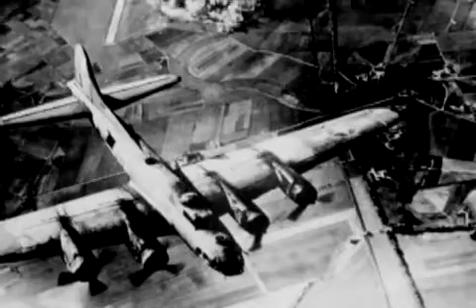The year was 1944. On battlefields throughout Europe and across the Pacific, the most monumental struggle in human history was being waged. It was a year in which the long-awaited Allied landing in Normandy signaled the beginning of the end of World War II. Arrayed against such a backdrop, most events tend to pale in significance. And yet, it is exactly in this historic context, 60 years ago, that the PM industry experienced a momentous beginning of its own, an event whose significance has grown with each passing year.

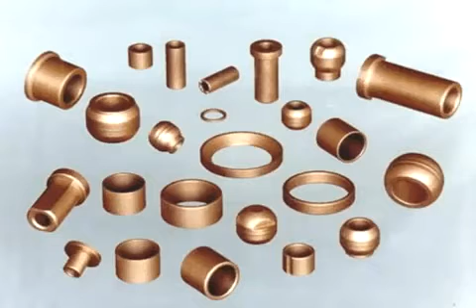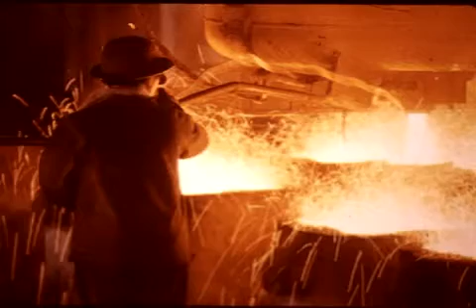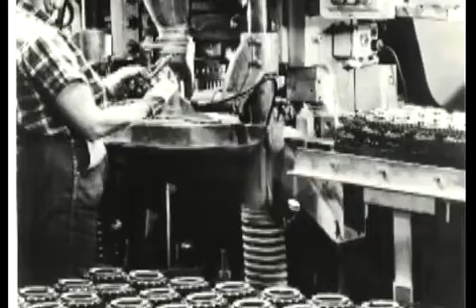In 1944, the PM industry's major product was self-lubricating bronze bearings, and non-ferrous metal powders were its principal raw materials. Shipments of U.S.-made iron powder amounted to only about 1,800 tons that year. Many aspects of PM were considered secret back then, and industry practitioners were loath to discuss too many technical details for fear the competition would learn about their special techniques.

Still, the industry, mostly through the impetus of the powder producers, recognized the need to organize itself, and in January of 1944 formed a trade association called the Metal Powder Association. The administration of the association was left to the Lead Industries Association, which was paid by the powder producers to run the MPA. The MPA's first meeting, at New York's Waldorf Astoria Hotel in May 1944, included a review of the organization of the association by its first president, H.E. Hall, president of Metals Disintegrating Corporation of Elizabeth, New Jersey, and the presentation of 5 technical papers.

The descendant of Metals Disintegrating, AccuPowder International LLC, is involved in the PM industry to this very day, as are those of many other early members of the MPA. Companies like General Aniline and Film Corporation, or GAF in New York, today doing business as International Specialty Products. New Jersey Zinc Sales Company in New York, today active as Zinc Corporation of America. And the Plastic Metals Division of the National Radiator Company in Johnstown, Pennsylvania, which still produces powder as North American Höganäs High Alloys LLC.

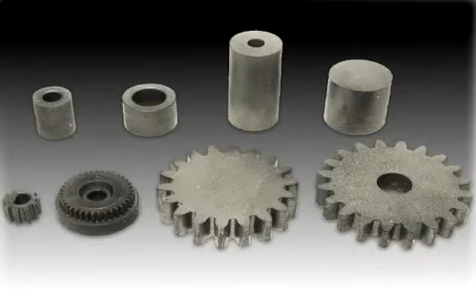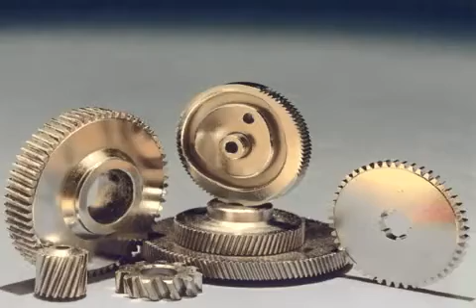By 1945, the association amended its bylaws in order to open membership to companies engaged in the manufacture of, quote, useful articles, end quote, from metal powders. An associate membership was also created, which allowed manufacturers of equipment used to make powders and parts, as well as consultants, to become members.

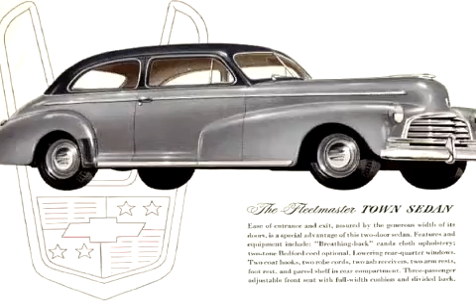As the 40s progressed, PM's major markets included business machines, home appliances, and of course, automotive, with the Amplex division of Chrysler Corporation in Detroit and GM's Moraine Products division in Dayton the dominant players in the industry. Early on, MPA launched an active program aimed at standardizing powder evaluation methods such as apparent density, flow, screen analysis, and hydrogen loss.

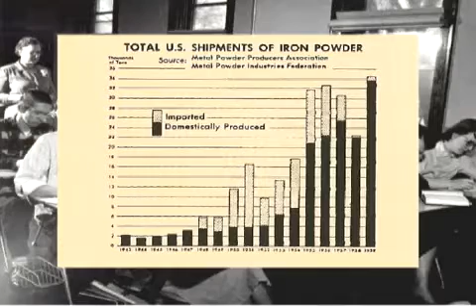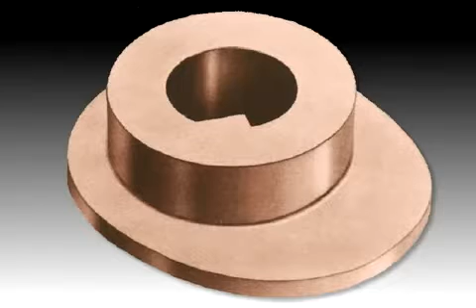As the 40s gave way to the 50s, PM applications started to broaden, and the iron markets began to take off. In addition to self-lubricating bearings, the automotive oil pump gear became a viable product. Filters, radio cores, copper-carbon brushes, contact points, and tungsten filaments were the other commercial products for PM. Large, well-known companies such as NCR, Maytag, Remington Arms, Pitney Bowes, IBM, and Lionel Corporation began designing PM parts for their products or installing in-plant PM departments.

In 1956, Kempton H. Roll, who had first become involved with the metal powder industry in 1948 when he came to work for the Lead Industries Association, was asked to serve as the association's first executive director.

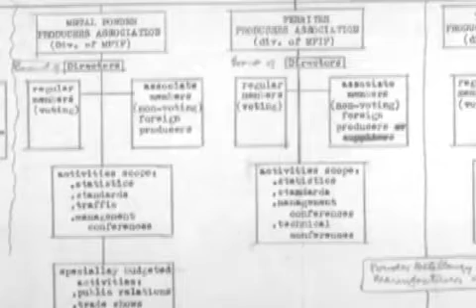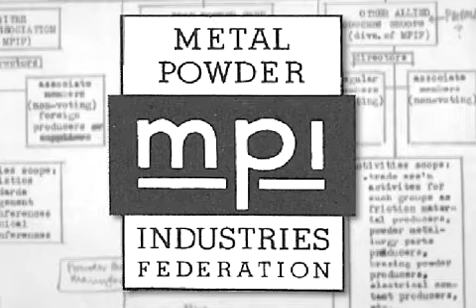Together with industry leaders such as B.T. Ernie DuPont of National Radiator, Ernest Klein of New Jersey Zinc, and George Roberts of Vanadium Alloy Steel Company, Kempton Roll developed the initial structure of the newly named Metal Powder Industries Federation, which was to be made up of separate associations covering different sectors of the PM industry. The Federation was officially constituted in 1957 with George Roberts as its first president.

Soon after, the Powder Metallurgy Parts Association, Metal Powder Producers Association, Powder Metallurgy Equipment Association, and In-Plant Powder Metallurgy Association, later to become the Advanced Particulate Materials Association, were formed and integrated into the Federation concept.

In later years, the Refractory Metals Association and the Metal Injection Molding Association were also launched and brought under the Federation's umbrella. In conjunction with MPIF's creation, industry leaders saw the need for a professional society to promote the advancement of powder metallurgy as a science. Thus, in 1959, it formed the American Powder Metallurgy Institute.

APMI has gone on to become recognized as the international professional society of the industry, with local sections, a monthly online newsletter, and the respected International Journal of Powder Metallurgy, first published in 1965.

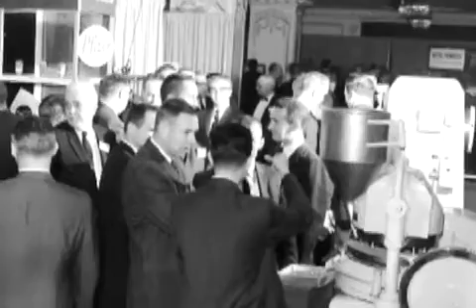To reflect the growing stature of the industry, as well as the wider scope of the association, MPIF sponsored the first International PM Conference in 1960, an important worldwide industry forum which now alternates every two years among North America, Europe, and Japan. Other milestones continued to be posted.

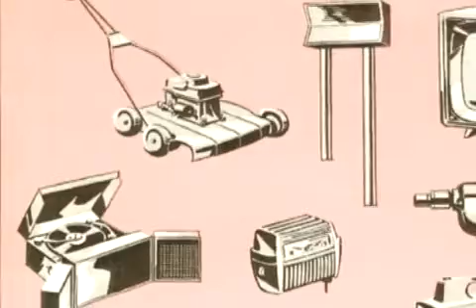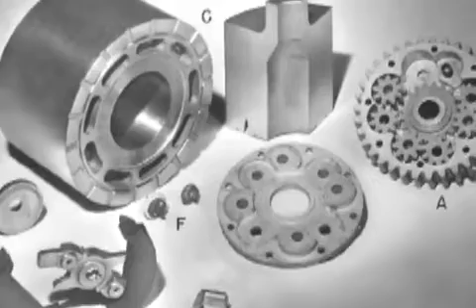To showcase its increasingly diverse range of applications, in 1965, MPIF introduced its PM Design Competition, which featured these interesting and unique winning entries. In 1966, Ford Motor Company pushed the technology by introducing the C6 automatic transmission, the first to use substantial numbers of PM parts.

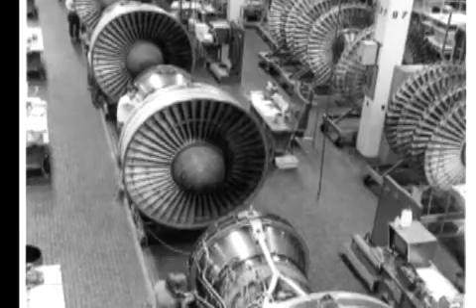During the 60s and 70s, the PM industry established itself as a viable technology capable of technological breakthroughs such as PM superalloys for aircraft applications and PM forgings for the automotive industry.

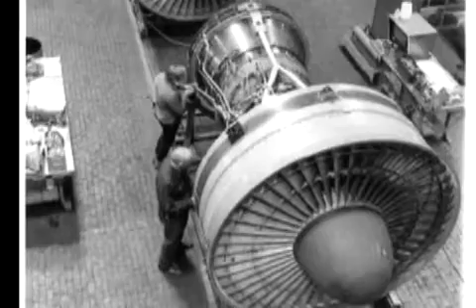In 1968, to deal with industry technological matters, MPIF formed the Research Advisory Board, which later became the Technical Board. In 1981, the Industry Development Board was formed and was charged with developing a cohesive, cooperative, industry-wide marketing program.

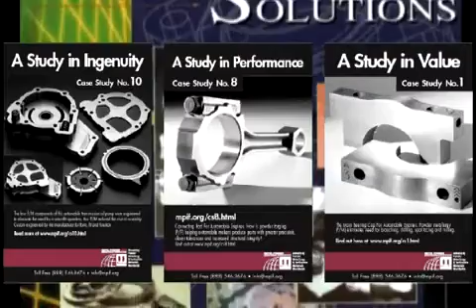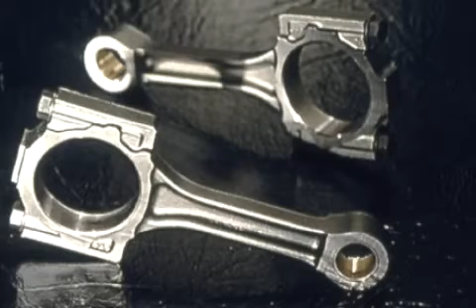The 1980s were fruitful years for rapid solidification technology, PM tool steels, and the beginning of metal injection molding. Other landmarks include Ford's first domestically produced PM steel hot forged connecting rod in 1987, as well as GM's adoption of PM bearing caps in 1993.

All the while, PM usage in the typical family car has continued to grow, with current levels being nearly three times what they were in 1977.

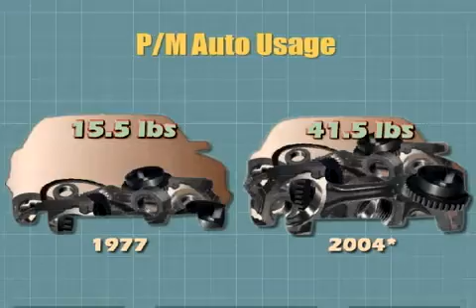Throughout its existence, MPIF has played a pivotal role in the growth and success of the industry, fostering a free exchange of technical and business information through courses, seminars, and international conferences and exhibits, along with becoming the premier publishing house for PM publications and technical literature.

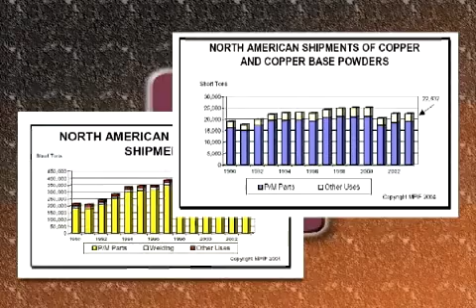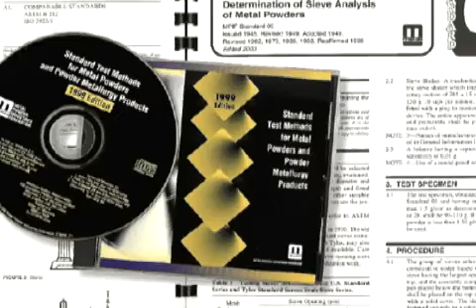It has been the prime mover in spreading the word about PM's benefits and capabilities internationally. MPIF associations have provided valuable statistical information to industry companies, helping them evaluate market size and growth and plan for investment in the future. In addition, MPIF has been a strong supporter of industry standards, seeking to raise the level of quality through powder and parts testing standards and helping PM parts buyers make better informed decisions through the information in Materials Standard 35.

MPIF has grown to more than 275 member companies and organizations. Its role as the leading trade association for the international PM industry is unquestioned. The Federation has initiated innovative programs for R&D and standards to advance the growth of the PM industry.

The MPIF Standards Board was established in 2001 to improve the coordination of standards and speed up the approval and introduction of new standards.

MPIF is also leading the cooperative worldwide initiative for the creation of a new global PM property database, one of its most ambitious projects ever, and one that will represent a quantum leap in the delivery of vital engineering information to the end-user community.

Most of all, through its six decades of existence, MPIF has been a gathering place for a diverse band of technical and business visionaries and geniuses who have helped make this industry what it is today.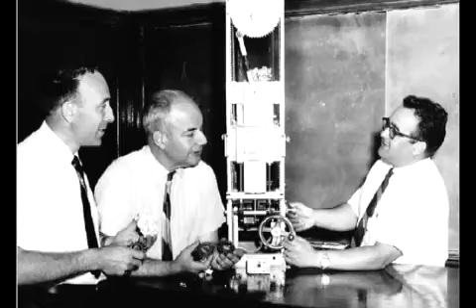They did things others said were impossible. Some were genuine rebels and characters with rough edges. Others were schooled at the finest universities.

Yet, they all shared an enduring vision to develop powder metallurgy into an important, internationally recognized and growing industry and technology. It is their efforts we celebrate as we proudly mark the 60th anniversary of the association they have all nurtured, the Metal Powder Industries Federation.